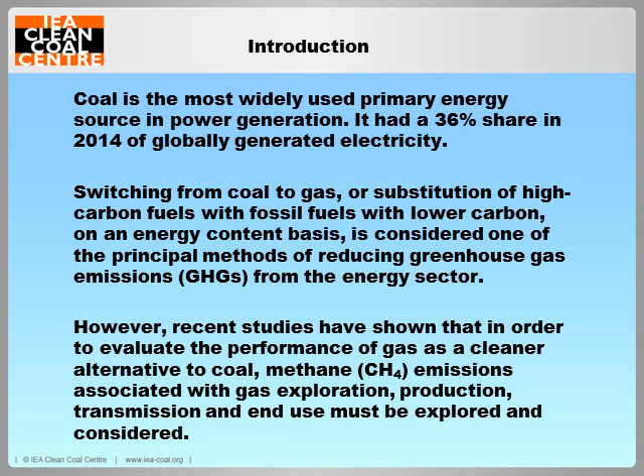Methane is an important greenhouse gas as it is approximately 25 times more potent than carbon dioxide over the 100 years period. Each greenhouse gas has active radiative or heat-trapping properties. To compare greenhouse gases, they are indexed according to their global warming potential, which is the ability of a greenhouse gas to trap heat in the atmosphere relative to an equal amount of carbon dioxide. Carbon dioxide assumes the value 1. Though the most prevalent, carbon dioxide is the least powerful greenhouse gas.

Nowadays, the other greenhouse gas potencies or global warming potential are often expressed in million metric tons of carbon dioxide equivalents. Now, despite its potency, as the amount of methane emitted due to combustion is a fraction of the carbon dioxide emitted, and as methane also has a shorter residence time in the atmosphere, which is approximately 10 years, its impacts were considered to be less detrimental compared to carbon dioxide. Today, this isn't the perception anymore, and there's plenty of information out there disputing that.

Methane is also the second largest contributor to greenhouse gas emissions after carbon dioxide. Major economic sectors, apart from energy, that produce methane emissions are agricultural processes, including livestock management and rice cultivation, and natural gas systems. Other major contributors include landfills, petroleum production, and coal mining. Please note that this is not an exhaustive list.

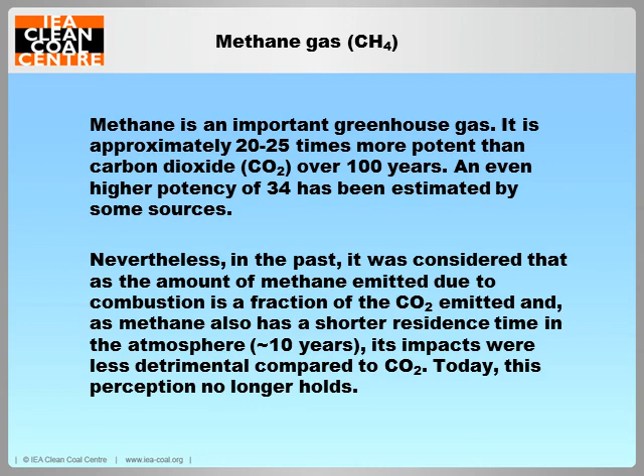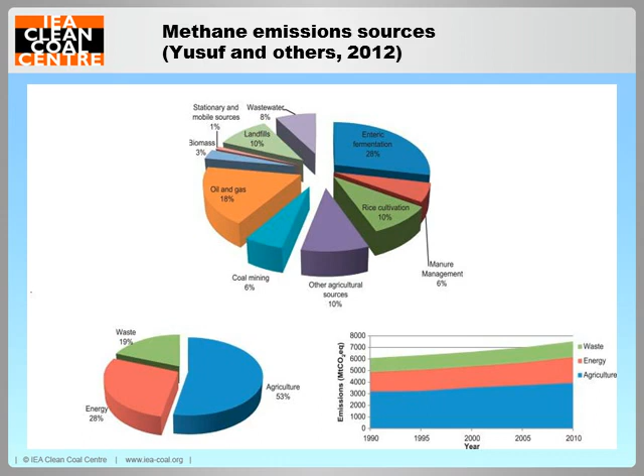The slide also shows in the far right bottom corner the share of these sectors and an increasing trend in emissions, which continues today. The potential of carbon dioxide emission reduction gained from utilization of 1 billion cubic meters of the methane is approximated at 3.6 million tons per year.

There are broadly two approaches used when it comes to measuring methane emissions. These are categorized as top-down and bottom-up. Both methodologies have their advantages and challenges.

Top-down approaches measure the amount of methane in the atmosphere from a sufficient height to capture emissions in a whole area. However, it is difficult to trace the emissions back to a particular source with this approach. The methodology allows the estimation of the amount of methane emitted in an area without identifying where it came from exactly. This is because there are other sources unrelated to natural gas extraction that also emit methane, such as wetlands and landfills.

Bottom-up methods examine the methane emissions at the source, whether that is at the gas well, along the pipeline transporting the fuel, or at the final destination. This provides a snapshot of emissions at a particular point in the process.

However, since, in general, data is measured or gathered at a particular section, only a partial picture of the process emissions is obtained. This may result in missing a leak in a pipeline somewhere along the line, making the estimates relatively low. On the other hand, measuring emissions from a series of wells that are particularly leaky would result in relatively high estimates. Most parties agree that top-down approaches tend to result in higher estimates than bottom-up approaches.

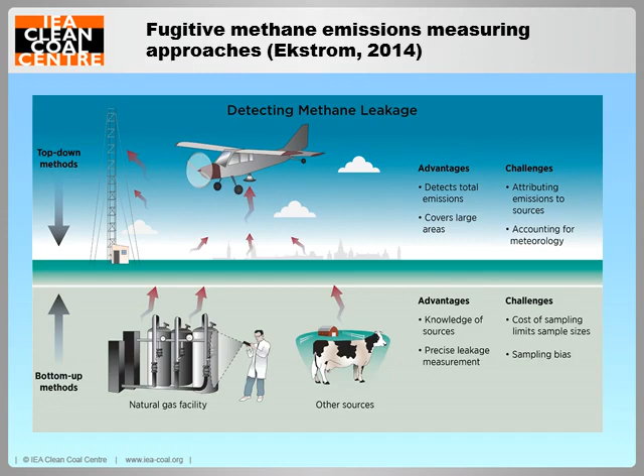There are four main categories of unconventional gas: shale gas, coalbed methane, gas from sandstones, which is tight gas, and the least well-known, methane hydrates. My presentation to you today will discuss mainly coalbed methane and shale gas in detail.

Tight gas refers to natural gas deposits that are particularly difficult to access from a geological viewpoint. The gas is contained in rocks with very low permeability in deep formations, typically deeper than 4,500 meters. Extraction requires a combination of drilling processes. Known reserves are found in countries with well-established gas industries, where significant detailed surveying has been conducted, including, but not limited to, the USA, UK, Russia, and Canada.

In the USA, for example, tight gas has been produced for more than 4 decades, and it now accounts for approximately 40% of the US unconventional gas output. Methane hydrates are the least well-known unconventional gas. They are crystalline deposits of methane found in extensive seams under deep water in various parts of the world. Several countries have demonstrated interest in this potential form of energy, including Canada, China, Japan, Norway, and the USA.

In March 2013, Japan was the first country to extract gas from offshore methane hydrates, with the aim of commercial production starting by early 2019. It is reported that Japan and the USA have agreed to cooperate on methane hydrate production onshore in Alaska, targeting test output by 2020.

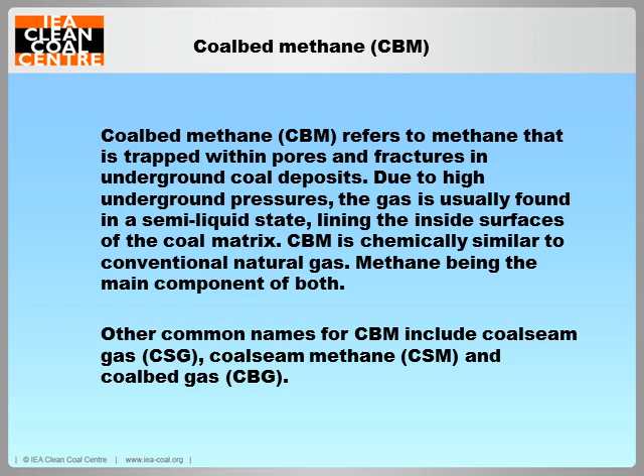Coalbed methane occurs in conjunction with hard coal at depths between 700 and 2,000 meters. Other common names for coalbed methane include coal seam gas, coal seam methane, and coalbed gas. Coalbed methane is the most widely used one.

The process may be applicable wherever coal is found. Spain, France, Poland, Australia, Canada, China, and many other countries have undertaken projects after the initial success in the USA. Over 60 countries have substantial coal reserves, and therefore have the potential of recovering the coalbed methane. In countries where coal is one of the few natural energy resources, coalbed methane can be a key to reducing air pollutant emissions and supplying much-needed energy to industry.

The attributes of coalbed methane are many, but mainly: production of the methane reduces further mining hazards; as the technology advances, coal beds too deep to mine economically may eventually be used to extract the methane; and methane emissions to the atmosphere from mines are reduced. The last point is important, as the environmental aspect of methane emissions into the atmosphere from coal mines is an international problem. In 2008, emissions from coal mines were estimated to account for as much as 10% of methane emissions from all sources worldwide.

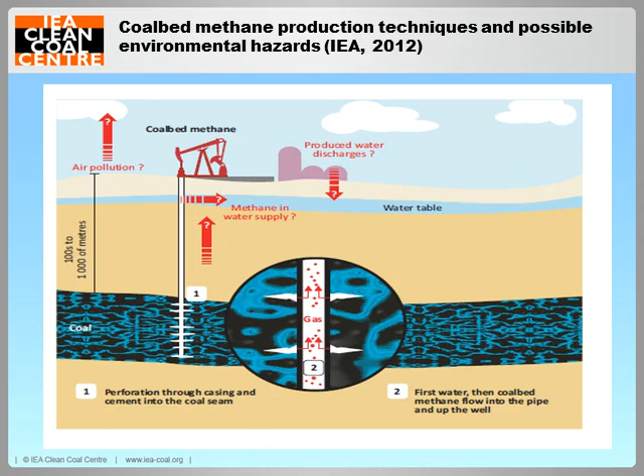Methane emissions occur at several stages during the production, supply, and use of coalbed methane. Fugitive emissions of methane are a significant source during the production phase. This includes methane released from exploration drilling, production, testing, and well completion, and gas production activities including processing, venting, and flaring. The term well completion is the culmination of activities and methods used to prepare a well for production following drilling, including installation of equipment for production from a gas well.

There are also concerns about the impact of coalbed methane production on groundwater flows and the supply and purity of water in aquifers adjacent to the exploited coal seams everywhere. The extent to which this can occur is location-specific and depends on several factors. The most important factors are the overall volume of water initially in the coalbed, the hydrogeology of the basin, the density of the coalbed methane wells, the rate of water pumping by the operator, the connectivity of the coalbed and aquifer to the surrounding water sources and therefore the rate of recharge of the aquifer, and the length of time over which pumping takes place.

Managing the produced water is a costly aspect of coalbed methane development in some areas. In most basins, water is a necessary byproduct of coalbed methane production. The quality of water, as I said, depends largely on the geology of the coal formation. The produced water is low in dissolved oxygen, so it must be aerated before it can be discharged into rivers. Irrigation with produced water may be problematic unless treated due to dissolved solids, which may cause soil damage.

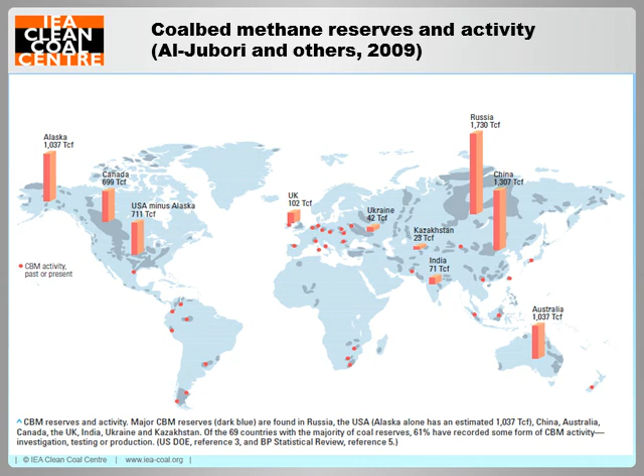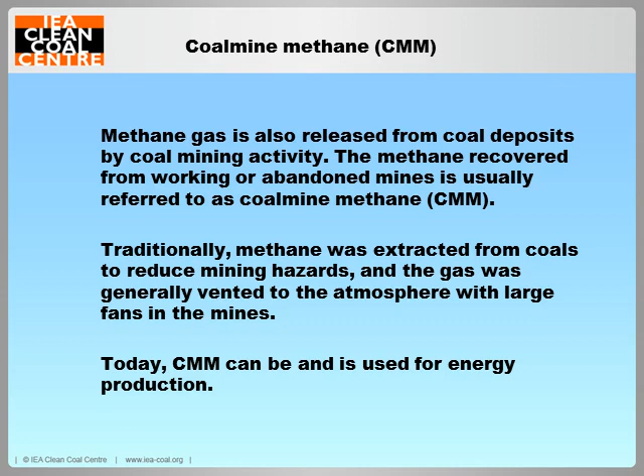As I mentioned before, methane gas is also released from coal deposits by coal mining activity. The methane recovered from working or abandoned mines is usually referred to as coal mine methane. Traditionally, methane was extracted from coal to reduce mining hazards, and the gas was generally vented to the atmosphere with large fans in the mines. Today, coal mine methane can be and actually is used for energy production. Drivers for coal mine methane recovery include mine safety and mitigation of significant volumes of fugitive methane emissions released from coal mines.

This slide shows the 10 countries with the highest coal mine methane emissions in 2010. The total emissions in 2010 were about 584 million tons carbon dioxide equivalent.

I would like to give you a little information on one of the international efforts made to reduce coal mine methane emissions. In 2004, 14 countries came together to launch the Methane to Markets Partnership. The partnership was relaunched as the Global Methane Initiative in 2010. The aim of the body is to reduce emissions of methane by promoting the development of projects that recover and use methane as a clean energy source. Today, the Global Methane Initiative includes 37 partner countries and the European Commission. In total, there are currently 355 coal mine projects in operation or under development throughout the world. Total emissions avoided through these projects were calculated as 73.6 million tons carbon dioxide equivalent.

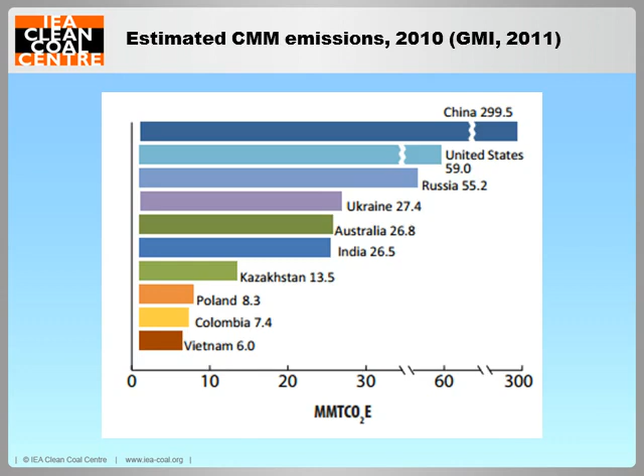China is the world's biggest coal consumer, accounting for over half of the world's total coal consumption in 2013 at 2.75 billion tons. Coal mine methane is used as boiler fuel in China, largely at the coal mines themselves, with some being used for power generation. China received a significant amount of investment in coal mine methane to power projects, largely through incentives such as those created under the Kyoto Protocol.

China's coal basins and coalbed methane resources are shown in this slide. The largest coal mine methane to power project in the world, at about 120 megawatts electric, funded by the World Bank, is at the Sihe mine in Jincheng, Shanxi province. The project utilizes 180 million cubic meters of both coalbed methane and coal mine methane from the Sihe mine. The Sihe project reportedly avoids the release of 2.5 million tons of carbon dioxide equivalent. Internal and external investment in Chinese projects continues. Furthermore, use of coal mine methane is being considered for application in the growing chemical industry in China.

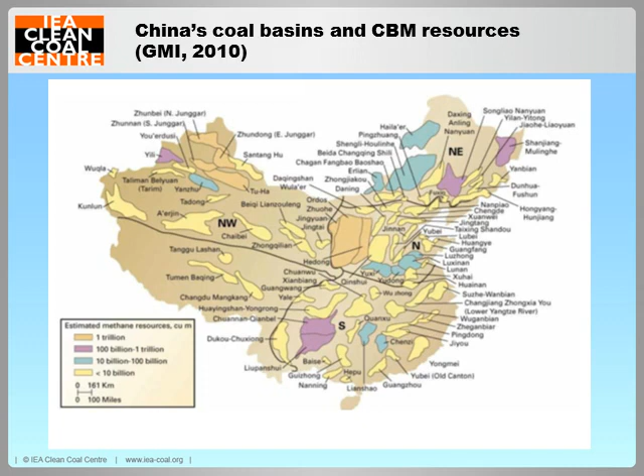Moving on to natural gas. This is a simple diagram of conventional and unconventional gas reservoirs. In natural gas formations, a distinction is made between thermogenic and biogenic methane. Thermogenic methane is formed from organic material at high temperatures and pressures in deep sedimentary horizons, whereas biogenic methane forms close to the surface as a result of microbial degradation.

Thermogenic methane trapped in conventional and unconventional reserves is used for energy production. Natural gas in conventional reservoirs migrates, depending on porosity conditions, from the source rock along partings and pressure gradients into overlying reservoir rock. Unconventional natural gas is the collective term for thermogenic natural gas, which is partially bound in deeper, dense reservoir rock. Shale gas occurs at depths of about 1,000 to 5,000 meters.

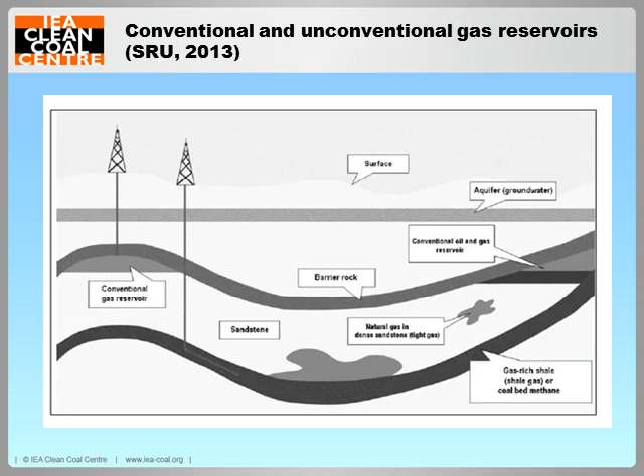There are nearly 700 known shales worldwide in more than 150 basins. In 2013, only a few dozen of these shales had undergone proper assessment for production potentials, most of these in North America. The potential volumes of shale gas are large, and this is already beginning to reshape significantly the gas markets worldwide. In about 30% of the identified basins, the existing infrastructure could reduce capital expenditures related to exploitation of the shale gas.

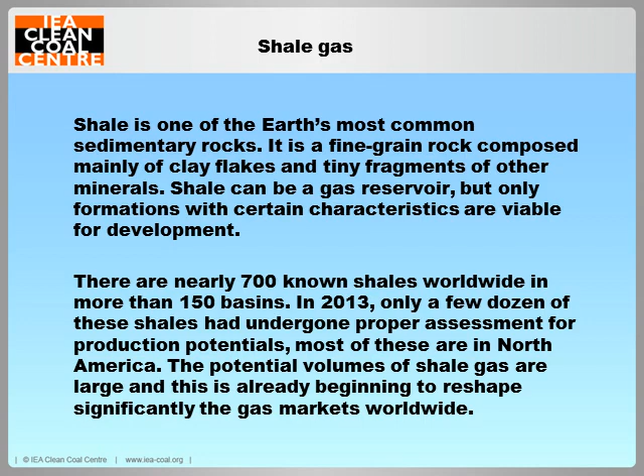However, even in these basins, there's likely to be significant need for capital expenditures to process, store, and distribute the gas through a pipeline system. The capital costs of developing that infrastructure will be considerable and may result in delaying new production from coming online or make the entire endeavor uneconomic.

The U.S. natural gas withdrawals by well type in billion cubic feet per day between 2007 and 2013 is shown in this slide. Note that the USA is the most active country in shale gas production, which almost doubled from 11% of overall U.S. production in 2008 to more than 20% in 2010. As you can see in the slide, this more than doubled again between 2010 and 2013. ExxonMobil considers that it may approach 50% by 2035.

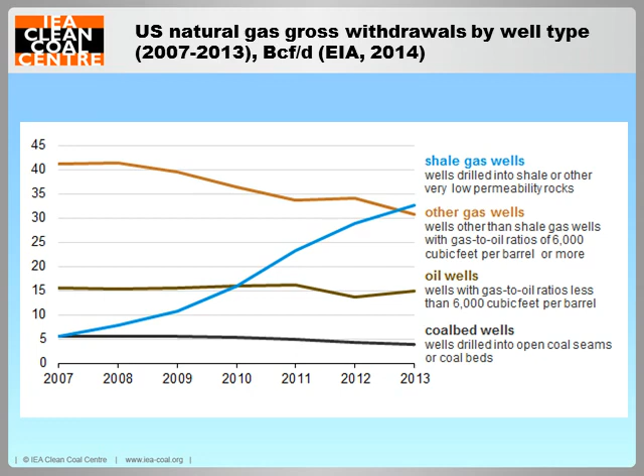This slide is a depiction of the Marcellus shale gas hydraulic fracturing or fracking process in reserves in Pennsylvania in the United States. Hydraulic fracturing, or as I said, fracking, is a technique used to boost the flow of gas from a new well. Large quantities of water and sand, together with certain, in some cases proprietary, chemicals, are pumped into a newly drilled well at high pressure to create fractures in the underground rock layers such as shale deposits. Gas can then migrate through the fractures, reaching the well much faster than it would otherwise.

The Marcellus shale gas has been a significant energy discovery, with estimates indicating a 40 to 50-year supply of natural gas for Pennsylvania. However, reaction to the project is discordant. It is considered by some that the Marcellus shale offers an abundant fuel to help bridge the gap between the current energy portfolio and a future resource that reflects both a reduced carbon footprint and security of supply. However, others have a distinctly opposing view due to the arguably detrimental environmental impacts of such developments in Pennsylvania.

The U.S. Department of Energy National Energy Technology Laboratory is currently conducting a comprehensive assessment of the environmental effects of shale gas production at 2 Marcellus shale test sites in southwestern Pennsylvania. That's Washington County and Greene County. The study aims to provide an unbiased, science-based source of information which can guide decisions about shale gas development. It also aims to develop better methods to monitor environmental changes, such as detecting methane emissions, water issues, and seismic events, as well as develop technology or management practices to mitigate these detrimental environmental impacts.

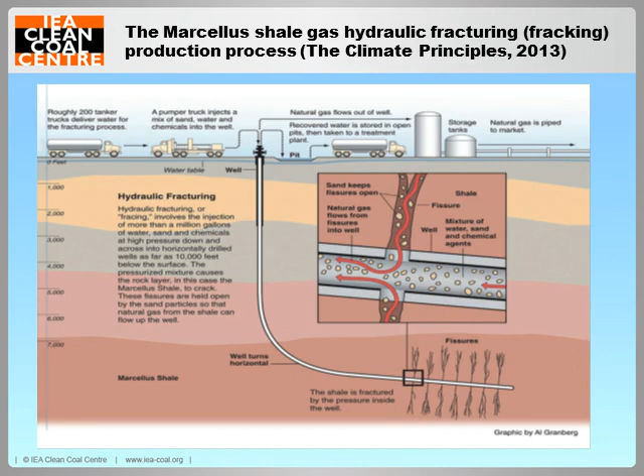There is considerable uncertainty over the amounts of fugitive methane emitted over the lifetime of a natural gas well. It's accepted that, in general, emissions from natural gas production are substantial and occur at every stage of the natural gas life cycle, from pre-production through production, processing, transmission, distribution, and end use. The U.S. Environmental Protection Agency estimates that more than 6 million tons of fugitive methane leaked from natural gas systems in 2011. Measured as carbon dioxide equivalent over a 100-year time frame, that is reported to be more greenhouse gas emissions than those emitted by all U.S. iron and steel, cement, and aluminium manufacturing facilities combined.

Some researchers consider that natural gas systems were the single largest source of anthropogenic methane emissions in the USA, representing almost 40% of the total flux, according to estimates from the U.S. Environmental Protection Agency in 2012. Through the summer of 2010, the U.S. Environmental Protection Agency is reported to have used emission factors from the 1996 Intergovernmental Panel on Climate Change study to estimate the contribution of natural gas systems to the U.S. greenhouse gases inventory. Increasing evidence over the previous couple of decades indicated that these emission factors were probably too low.

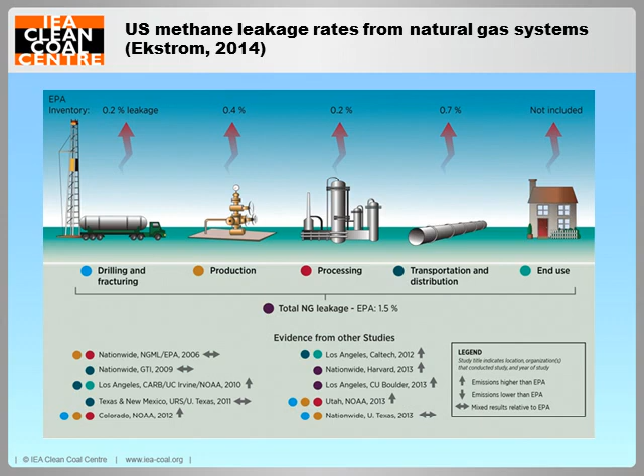In April 2011, the U.S. Environmental Protection Agency released updated factors. These are shown in this slide. The U.S. EPA has since released further updates, the latest of which were on 4th of April 2014. Many scientists and researchers consider that these are still underestimated.

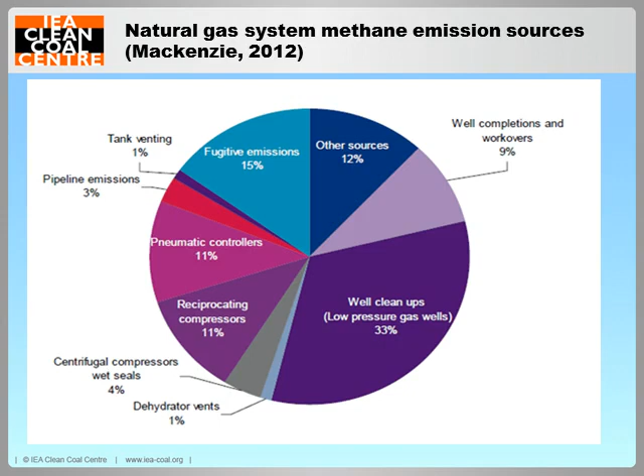The estimates for natural gas systems methane emissions in 2009 is shown in this slide. The new EPA methane emission factors resulted in a doubling in the estimate of methane emissions from the natural gas industry. However, the U.S. Environmental Protection Agency only increased emission factors for upstream and midstream portions of the natural gas industry. That's leaks and emissions at the well site and in processing gas.

Factors for downstream emissions, which is storage systems and transmission and distribution pipelines, continue to be based on the IPCC 1996 report, although the United States Environmental Protection Agency is considering modifying these as well. Natural gas system emissions in this slide are based on the average emission of 2.6% of the methane produced from natural gas wells over their production lifetime, with 1.7% from upstream and midstream emissions and 0.9% from downstream emissions.

Researchers note that these methane emission estimates are based on limited data and remain uncertain. Estimates in literature for downstream emissions of methane from natural gas systems range from as little as 1% to 10% of the methane produced over the lifetime of a well. There are currently many ongoing studies which aim to provide more clarity on the extent of fugitive methane emissions from natural gas systems. A clearer picture is expected to emerge when data from these studies are analyzed in conjunction with industry data reported to the United States EPA Greenhouse Gas Reporting Program.

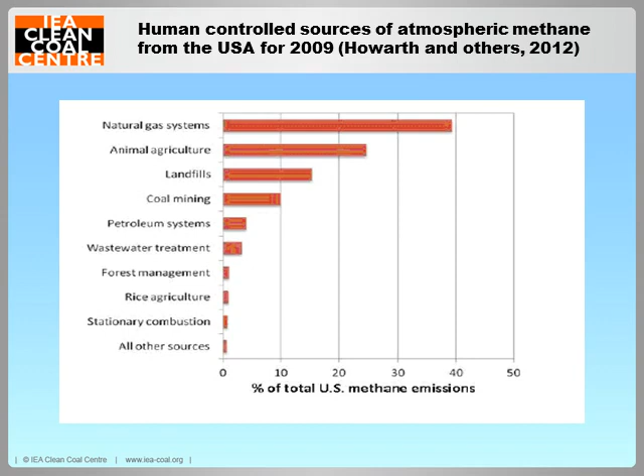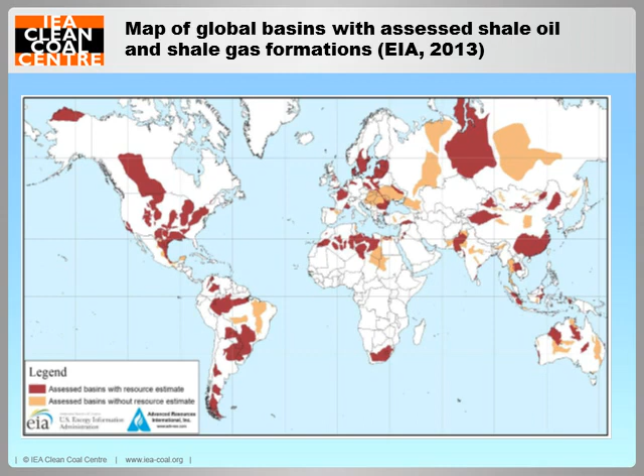The International Energy Agency published a review entitled Golden Rules for a Golden Age of Gas in 2012. It projected that the share of unconventional gas in total gas production increases under the Golden Rules case from 14% in 2010 to 32% in 2035. The Golden Rules case assumes that conditions are put in place to allow for a continued global expansion of gas supply from unconventional resources. This allows unconventional gas output to expand not only in North America but also in other countries around the world with major resources.

Of the different sources of unconventional supply, tight gas at 245 billion cubic meters accounted for just over half of the global unconventional production in 2010. However, it was rapidly overtaken in projections by the exploration and production of shale gas, which is forecast to rise from about 145 billion cubic meters in 2010, which is 31% of total unconventional output, to 975 billion cubic meters in 2035, almost 60% of the total, to satisfy demand. Production of coalbed methane likewise is projected to grow rapidly from 80 billion cubic meters in 2010 to nearly 410 billion cubic meters in 2035.

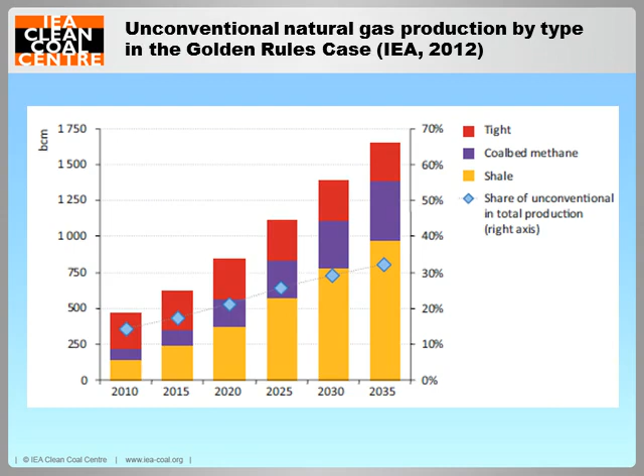Although many European states are more willing to consider shale gas to decrease heavy dependence on imports, for example Russian gas, environmental concern is at the core of a cautious approach with respect to hydraulic fracturing in many member states. However, the ongoing conflict between Russia and Ukraine continues to raise concerns about gas supply security. Although a few pilot production tests have been conducted, for example in Poland, as yet in 2015 there is no commercial production of shale gas in Europe. It is expected, though, that commercial production could start between 2015 and 2017 in some member countries, such as Poland and the United Kingdom.

In the debate about fracking in Germany, two basic positions have been identified. On one hand, shale gas is expected to contribute to climate protection and the transformation of the energy system towards renewable energy sources. In addition, shale gas production is claimed to result in lower energy costs, thereby making the industry more competitive. On the other hand, there are objections to fracking, especially on the grounds that the use of hazardous substances leads to unjustifiable and uncontrollable risks for the environment.

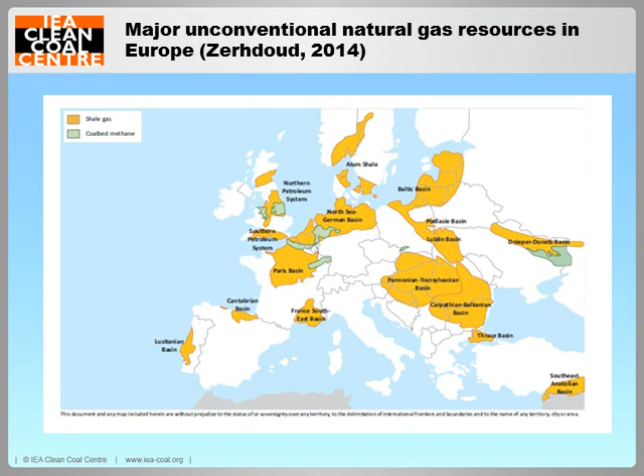Global anthropogenic carbon dioxide emissions into the atmosphere in 2013 are estimated to be 38.8 gigatons, the highest in history and about 46% higher than in 1990. Global carbon dioxide emissions from fossil fuel utilization are estimated to have increased in 2013 by 2.1% compared with the average increase of 3.1% per year from 2000 to 2012. All well and good. Since the Industrial Revolution, more than 2 centuries ago, approximately 30% of the anthropogenic carbon dioxide emissions have been taken up by the oceans and about 30% by land vegetation. The remaining 40% of emissions have led to an increase in the concentration of carbon dioxide in the atmosphere.

To put it very simply, the origin of the carbon dioxide in the atmosphere can be determined by examining the different types, i.e. the isotopes of carbon in the air samples. This identifies the additional carbon dioxide as coming from human activities, mainly the burning of fossil fuels, and not from natural sources. In 2012, the average emissions in the European Union were 19.2% below 1990 levels, thus meeting the first Kyoto commitment. The downward trend is expected to continue in the second commitment period of 2013 to 2020.

According to the Global Methane Initiative, global anthropogenic methane emissions for 2020 were estimated at 6,875 million tons carbon dioxide equivalent. Approximately 50% of these emissions are estimated to have come from the 5 sources: agriculture, coal mines, landfills, oil and natural gas systems, and wastewater.

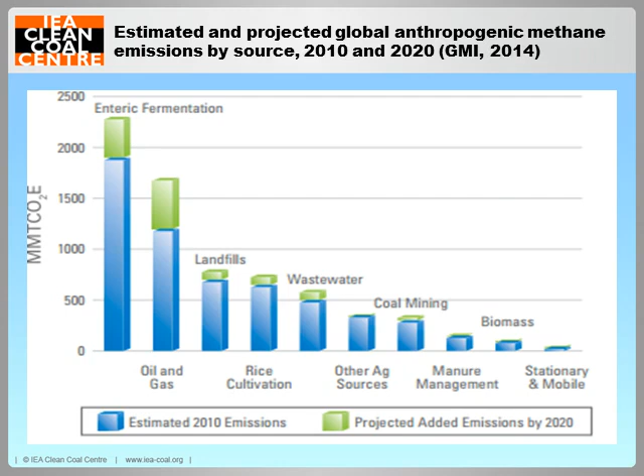As you can see here, from 2010 to 2020, the relative contributions of the agriculture, coal mining, and landfill sectors are projected to remain relatively constant, changing by less than 1% of global anthropogenic methane emissions, or approximately 7 to 10% within each sector. Methane emissions from wastewater treatment systems are expected to increase by nearly 12%. Oil and gas systems, however, are expected to increase by nearly 35% from 2010 to 2020, and will account for 3% more of the projected global anthropogenic methane emissions annually.

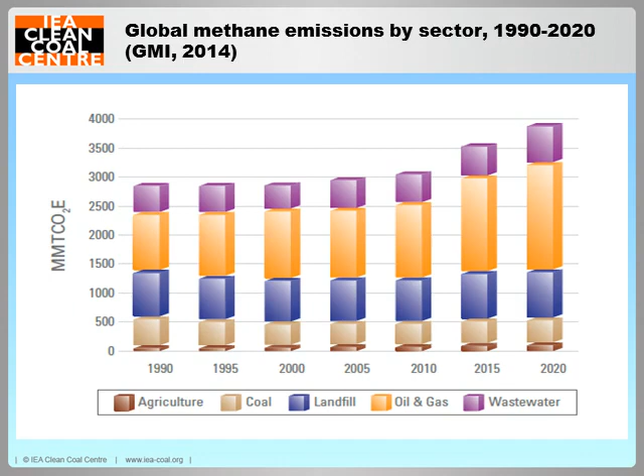Carbon dioxide, methane, and nitrous oxide are all produced during coal combustion. Nearly 99% of the fuel carbon in the coal is converted to carbon dioxide during the combustion process. The greater the efficiency of the combustion process, the less coal is consumed, and therefore total emissions to the atmosphere are reduced, including those of greenhouse gases. The contribution of stationary coal combustion to total methane emissions is generally considered minor. Nevertheless, the power sector is recognized as the area where the biggest greenhouse gas reduction opportunities exist, in addition to the industrial, commercial, and residential sectors.

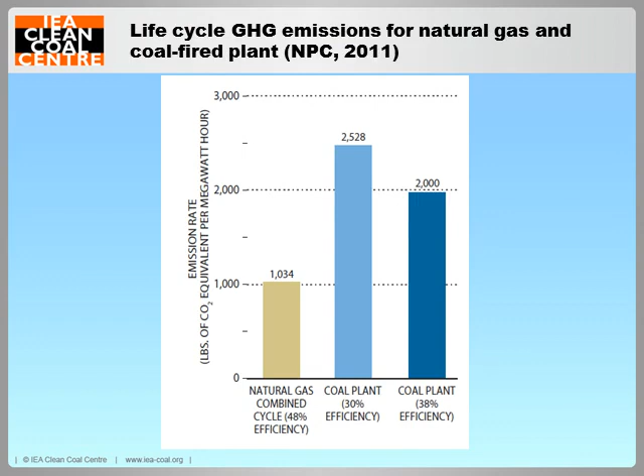Recently, in the United States, favorable gas prices combined with environmental regulations have resulted in displacing coal-fired power generation. This trend is expected to continue, with plans to retire older, less efficient coal-fired power plants. However, in the long term, if greater reductions in greenhouse gas emissions are desired, consensus is that all fossil fuel power generation, including natural gas, must be curtailed. The life cycle emissions for natural gas are reported as about 35% lower than coal on a heat content basis. In terms of electricity production, for efficiencies given in this slide, natural gas had about 50 to 60% lower greenhouse gas emissions than those of coal-fired plants.

Upgrading the efficiency of the world's coal-fired fleet to reduce carbon dioxide emissions was the subject of a recent report from the IEA Clean Coal Center. A current state-of-the-art coal-fired plant operating with a high-efficiency ultra-supercritical steam cycle will be more efficient, more reliable, and have a longer life expectancy than its older subcritical counterpart, which achieves in general an average efficiency in the mid-30s. In the United States, the average efficiency of subcritical units in 2007 is reported as 32%.

Most significantly, an ultra-supercritical plant would emit almost 20% less carbon dioxide compared to a subcritical unit operating under similar duty. In the near future, the development in advanced ultra-supercritical steam cycles promises to continue this trend. A plant operating at 48% efficiency would emit up to 28% less carbon dioxide than a subcritical plant, and up to 10% less than a corresponding ultra-supercritical plant. Ultra-supercritical plants have already been constructed and operated in Europe and Japan.

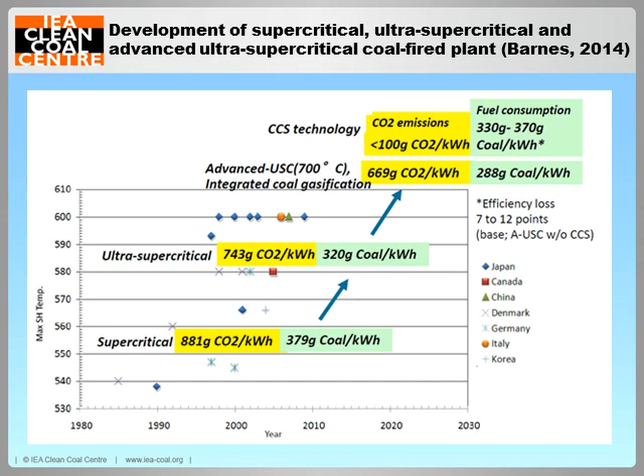The use of coal and gas will continue to expand at least until the middle of the century. In power generation, there will be major growth in the use of coal in developing countries, particularly China and India, while natural gas use for power generation is expected to expand in the developed world. The United States is currently the country where there is a major program of substituting coal-fired plants with gas-fired facilities. This is mainly due to the increase in natural gas production and the subsequent reduction in gas prices.

At the end of 2012, there were 1,308 coal-fired electric generating units accounting for 310 gigawatts of electricity production in the United States. In 2014, the United States Energy Information Administration released a report showing that more coal-fired power plants are projected to retire by 2016 than previously thought. Previous predictions were that about 40 gigawatts of capacity would be retired by 2016.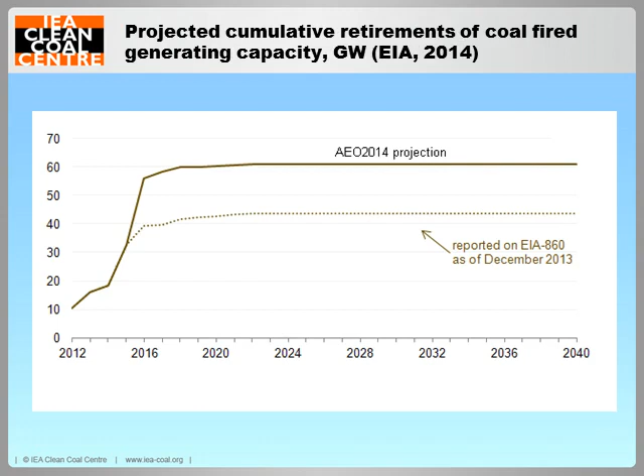The projections shown in this slide indicate that this number is more likely to be about 57 gigawatts by 2016 and a total capacity of about 60 gigawatts to retire by 2020. As you can see, 90% of the retirement is occurring by 2016. In 2012, coal-fired capacity retirements totaled 10 gigawatts, representing about 3% of the 2011 capacity.

China is the world's largest power generator. Net power generation was an estimated 4,476 terawatt-hours in 2011, up 15% from 2010. Electricity generation increased by more than 89% since 2005, and projections are that total net generation will increase to 7,295 terawatt-hours by 2020 and 11,595 terawatt-hours by 2040. That is nearly 3 times the generation level in 2010.

Although China plans to rely on more electricity generation from nuclear, renewable sources, and natural gas to replace some coal to reduce carbon dioxide emissions and air pollution in urban areas, China stated in January 2015 that coal will continue to play a major role in the energy mix for the foreseeable future. Nevertheless, the government in China has already shut down about 80 gigawatts of small, inefficient plants between 2005 and 2010, and is looking to continue the modernization of its coal fleet in favor of larger, more efficient units as well as technologically advanced ultra-supercritical units.

In addition, the authorities have prohibited companies from building new coal-fired power plants around its three major cities, Beijing, Shanghai, and Guangzhou, where air pollution has become quite a problem in recent years. Nevertheless, it is projected that by 2040, China will bring on more than 450 gigawatts of new coal-fired capacity. On the other hand, in 2014, natural gas played a small role in overall power generation, which consisted of 38 gigawatts of installed capacity. However, the government plans to invest in more gas-fired power generation capacity.

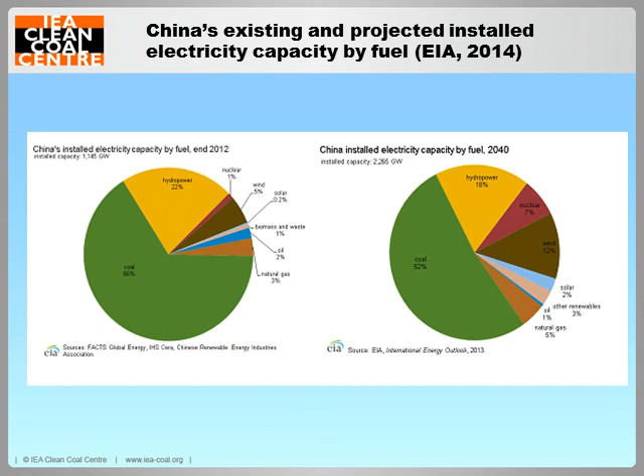For example, all of the coal-fired facilities, representing about 2.4 gigawatts of capacity in Beijing, were to be replaced with gas-fired plants by the end of 2014. However, although the first of these four was shut down in mid-2014, Beijing's three remaining coal-fired power plants are now to be closed by the end of 2016. Overall, China's efforts to shift coal-fired generation to more gas-fired generation in the long term depend on the country's ability to increase domestic production through shale gas and offshore reserves, as well as imported sources.

There is considerable governmental, industrial, academic and public, but also media attention focusing on the question of whether gas is better than coal from a climate perspective, concentrating on fracking. An important issue and one currently not addressed is the clear and pronounced public opposition to the development and research on the impact of fracking. The attitude seems to be either for or against. Studies that support a particular view are considered, while other research which does not meet with that specific view is either discredited or simply rejected.

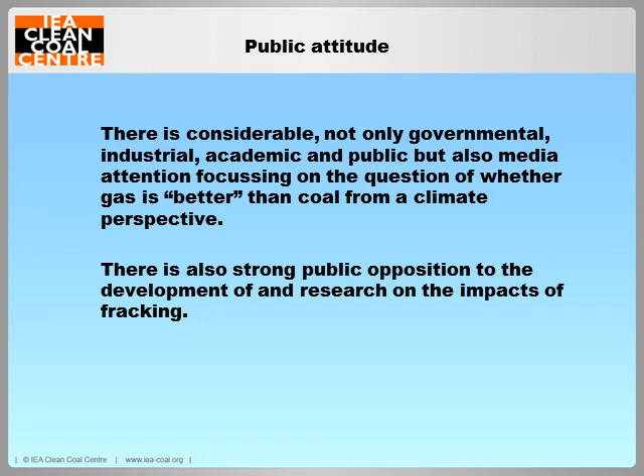Now, knowing how much methane is leaking from the natural gas system is essential in determining the potential climate benefits of natural gas use. The extent of reducing the global warming impact of methane depends largely on methane leakage rates from the natural gas system, the rate at which coal-based power generation is replaced with gas, and the time passage after switching from coal to gas.

The last factor is important because the potency of methane on a pound-for-pound basis as a greenhouse gas is about 100 times that of carbon dioxide when first released into the atmosphere, and decays to about 70 times that of carbon dioxide over 20 years, and to 25 times that of carbon dioxide over 100 years.

The ongoing shift from coal to gas in power generation in the United States is unlikely to provide a 50% reduction in greenhouse gas emissions typically attributed to it over the next 3 to 4 decades, unless gas leakage is maintained at the lowest estimated rates of 1 to 1.5%, and the coal replacement rates are maintained at more than 5% per year.

Although the coal replacement program may be achievable, according to the many scientists and researchers reviewed in the publication, the 1 to 1.5% estimates contain significant uncertainty and lack sufficient actual real-time measurements to guide policy decision-making at national level. Basically, numerous studies conclude that if fugitive methane emissions exceed 3% of total gas production, the climate advantage of natural gas firing over coal disappears over the 20-year time horizon.

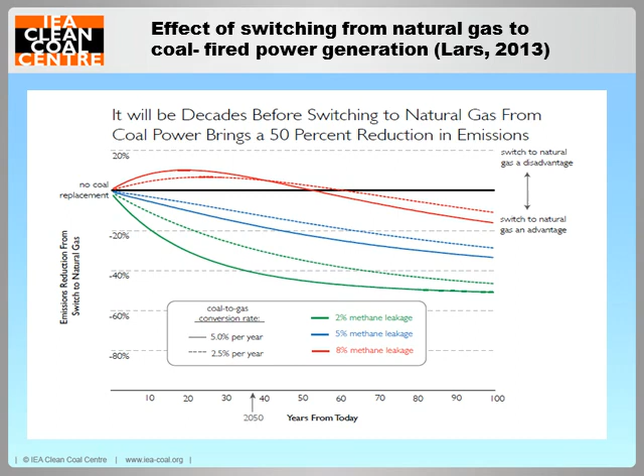So what does the future hold for coal and gas? Forecasts indicate that by 2040, the world's energy supply mix divides into 4 almost equal parts: coal, gas, oil, and low-carbon sources. Resources are not a constraint over this period, but each of these 4 faces a distinct set of challenges.

However, policy choices and market development that bring the share of fossil fuels in primary energy demand down to less than 75% of what it is today will not be enough to stem an estimated 20% rise in energy-related greenhouse gas emissions. However, electricity will continue to be in short supply. Approximately 7,200 gigawatts of capacity will need to be constructed to replace existing power plants due to retire by 2040, which accounts for 40% of the current fleet.

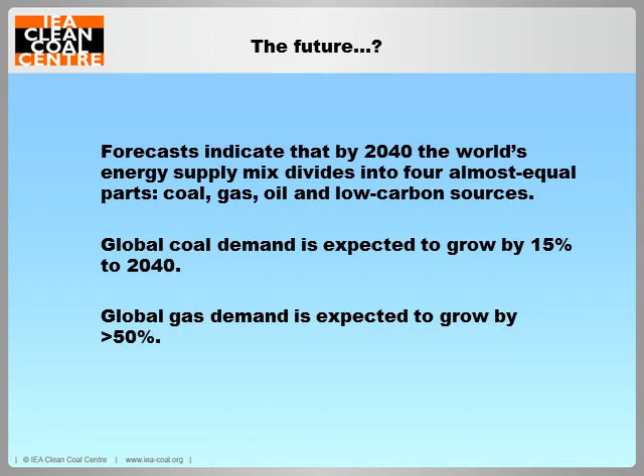Global coal demand is expected to grow by 15% to 2040, but almost 2/3 of the increase will be in the next decade, after which it will gradually plateau. By contrast, by 2040, more than 50% growth in demand is forecast for natural gas, especially since increasingly flexible global trade in liquefied natural gas offers some protection against the risk of supply disruptions. The increase is forecast to be almost everywhere, Europe being the main exception, and unconventional gas is expected to account for almost 60% of global gas supply growth.

In summary, methane is more potent than carbon dioxide as a greenhouse gas and therefore is a significant contributor to climate change, especially in the near term, that's in the next 10 to 20 years. Methane is the second most abundant greenhouse gas after carbon dioxide and accounts for 14% of global greenhouse gas emissions.

The question of whether gas is less detrimental from a climate perspective has become more important since there are a large number of older, inefficient coal-fired power plants throughout the world that continue to operate today. However, the availability of coal and/or gas in a region plays and will continue to play a pivotal role in the choice of fuel for base load power generation.

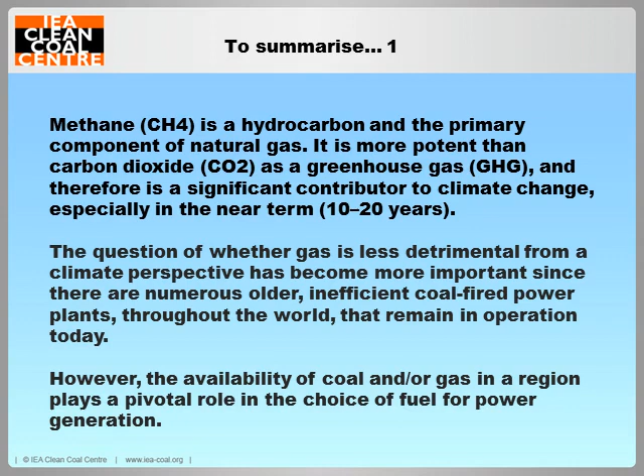At the point of combustion, natural gas is roughly half as carbon intensive as coal. However, this is an inequitable comparison as it does not take into account the upstream, midstream and downstream methane emissions resulting from gas exploration, production, transmission and distribution.

It is the opinion of some researchers that unless leakage rates for new methane emissions can be below 2%, substituting gas for coal is not an effective means for reducing the magnitude of future climate change. Published material indicates that if methane emissions exceed 3% of total gas production, the climate advantage of natural gas firing over coal disappears over a 20-year time frame.

So in conclusion, security of supply and the need for a reliable, available and affordable fuel mix make coal-based power generation continue to play a major role, albeit gradually a smaller one, in providing electricity throughout the world for the foreseeable future. And opinion at the end of 2014 is leaning towards accepting that fugitive methane emissions from natural gas systems, unless minimized, reduce the net climate benefits of using lower carbon natural gas as a substitute for coal for electricity generation, especially in the near term.

To clarify that point, at 1% leakage, natural gas provides some greenhouse gas gains over coal in every comparison. However, as methane leakage increases, and at 10%, the top end, the short-term potency of methane is evident in that natural gas substitution results in higher emissions over the life cycle in every case at time zero and over the 20-year period. At the 100-year timescale and with 10% leakage, the results could still be higher for natural gas. Research, however, indicates that current leakage from the natural gas system is likely to be in the 2 to 4% range.

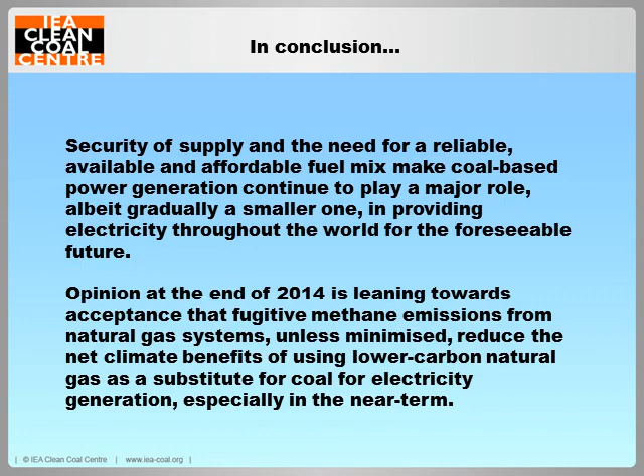Final note, it is essential for a country to maintain fuel mix diversity in the power sector. Too much reliance on any one fuel can expose utilities, end users, and the economy to the risk associated with commodity price volatility. The increase in natural gas and renewables generation of recent years in some parts of the world has increased the fuel diversity of the power sector by reducing the dominance of coal.

Nevertheless, a range of projections show that coal and gas will continue to play major roles in power generation for the future. However, assessment of the state of the coal and gas industries rather depends on which part of the world we're looking at. That is the end of my presentation.